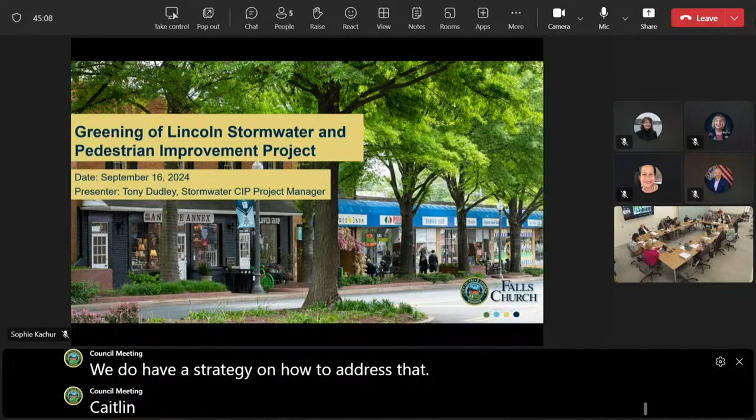Our first item is a briefing from staff on the Greening of Lincoln project. Tony Dudley is our project manager for this, and he'll detail the many meetings he's had with residents of the street, listening and processing input, and working through to decisions that represent a good synthesis of that input, with some compromises between competing views, but always staying aligned with the original purposes of the project, which Tony will describe. We do have budget implications from changes that came about through public input. The project budget is over $11 million at this point, so we want to talk about those numbers with council. We have a strategy to address that, and Caitlin Sobsey is here to help talk about some of those numbers and strategies. This could then flow into the council's year-end financial report and budget amendment discussion happening at the next meeting in a week.

With that introduction, I want to thank our staff, Tony in particular, for all the work put into the project, and all of our community members who've been so engaged. Andy, I don't know if you had any other introductory comments, or if we just turn it straight over to Tony. I'll turn it over to Tony.

Okay, Mr. Dudley. Good evening everyone. My name is Tony Dudley, I'm the Stormwater Project Manager for the City of Falls Church, DPW. Thank you again to Council and the City Manager's Office for allowing me to come speak to you this evening about our project, the Greening of Lincoln.

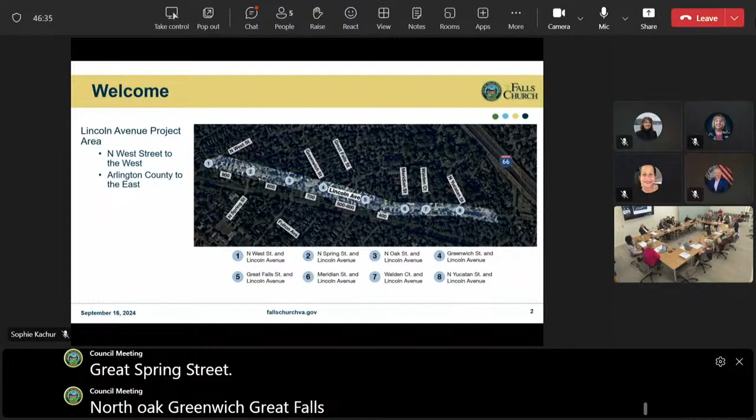The Greening of Lincoln project—I don't want to sound too formal, this is an informal work session, so I sound like I'm in front of Congress or something. The project spans from North West Street to the west, all the way to the Arlington County line to the east. It crosses several roads along the way: North West Street, Spring Street, North Oak, Greenwich, Great Falls, Meridian, Walden, and finally Yucatan, where it exits the city.

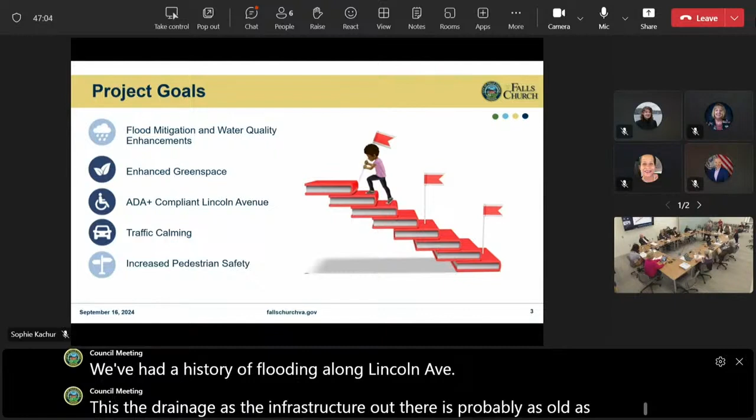The project had many goals. The first and foremost was flood mitigation and water quality enhancements. We've had a history of flooding along Lincoln Avenue. The drainage infrastructure out there is probably as old as the railroad bed out there—a lot of the pipes date back to when there was actually a railroad running along that corridor.

Another goal was enhanced green space. We wanted to reduce some of the unused and underused parking in order to create more green space along the corridor, and also to help reduce the overall impervious area. That in turn helps with permitting the project, because in many instances the state requires us to pay into a mitigation fund to do this kind of work, even though we're trying to improve the storm drainage—they treat us just like they would treat a developer. So we're trying to do our best to reduce the cost of permitting.

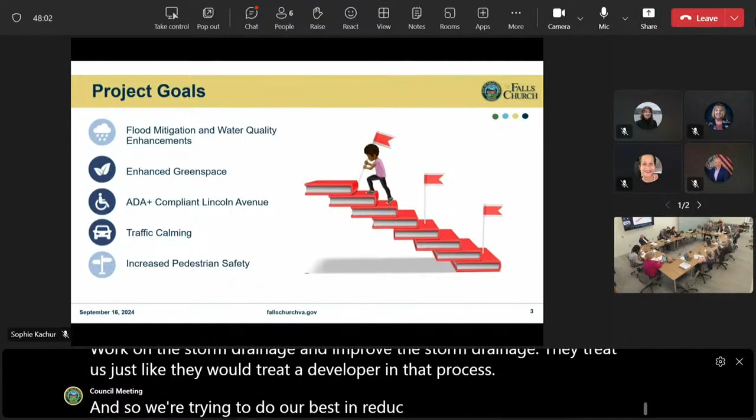ADA compliancy was a big one too. Right now the sidewalks are at best 4 feet wide, and all of them have poles that go right down the middle, as you'll see later.

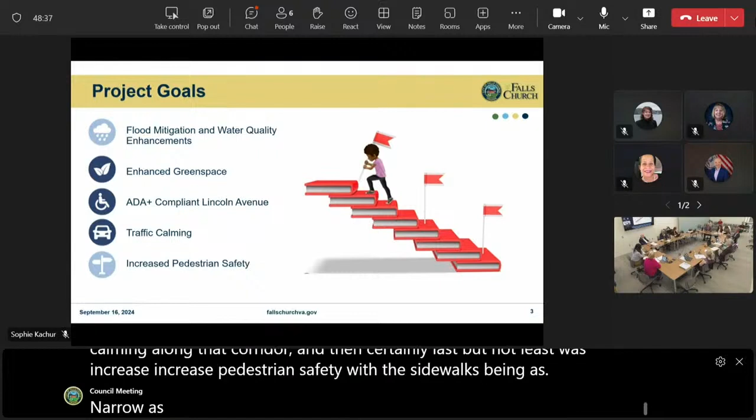Next was traffic calming. Based on the public's review of the project early in the process, before I even came along, there was a need to do traffic calming along that corridor. And then certainly last but not least was increased pedestrian safety. With the sidewalks being as narrow as they were, people had to walk in the road, sight distances were an issue, crosswalks were an issue, so we wanted to see that play out as well.

So some considerations we had to take into account included the existing condition studies we've done out there, local ordinances - I won't read all of these, you have them in front of you - and grant compliance, because the money we're spending has to be spent for a particular reason, a very specific reason. So there are some things the money could not be used for.

Green infrastructure benefits - that was something that when I came on board with the city some 3 years ago, council was pretty heavy on trying to incorporate green infrastructure into the city's stormwater infrastructure.

From a roadway sidewalk standpoint, we had to deal with perceived property boundaries. Even though you might have right-of-way lines that are further back in people's yards, people have adopted that front yard and front area of the right-of-way as their own and don't want to see it changed. Parking was an issue, has been an issue, and will continue to be an issue, it seems, as long as we do this project.

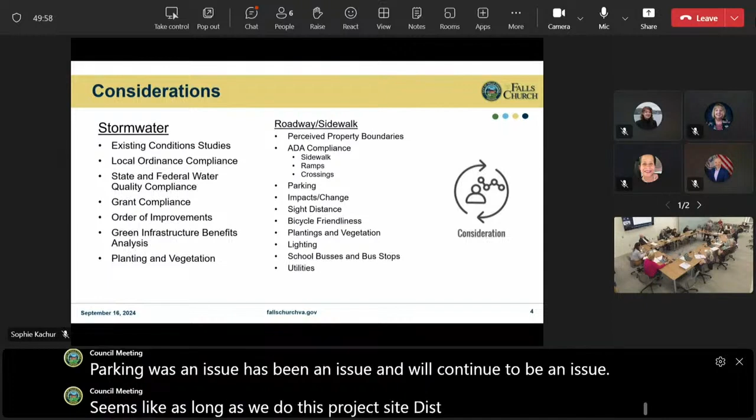Sight distances is another one we talked about - we had to look at all the intersections out there for sight distance components. More planting and vegetation. Lighting is another one we'll cover later, not as part of this project, but certainly something we'll have to deal with eventually. And then school buses and bus stops - yes, we talked to the schools and got their take on where bus stops were, making sure all turning radiuses could be handled by school buses and the like.

You guys were updated on the project back in January of this year. There wasn't a lot of information - we had just come out of the planning phase and were just starting the design phase at that time.

The CACT was updated for the second time - actually we've been to them twice, and my friend Arthur wants a third time for us to come and talk to them. Our first public meeting was held in February, where a lot of you were there, kind of saw the interaction with the community. It was standing room only in council chambers, so we had a great amount of participation. The Planning Commission was briefed in April of this year, and so was the Public Utility Commission.

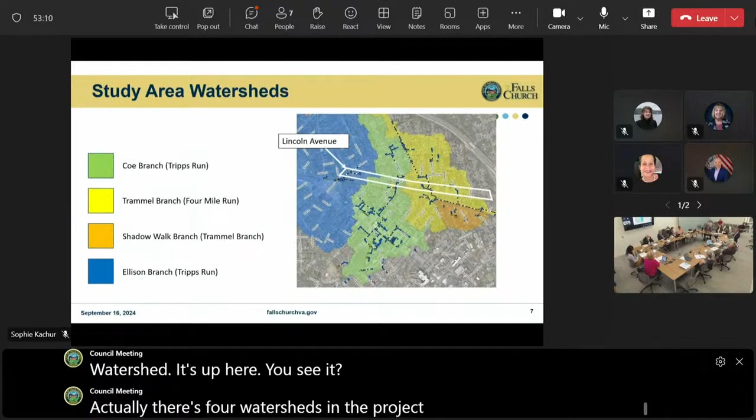Let's talk about the study area watersheds. There are 4 watersheds in the project area. A watershed is simply an area where rain that falls on it will drain to a single point. We have 4 of them in this area.

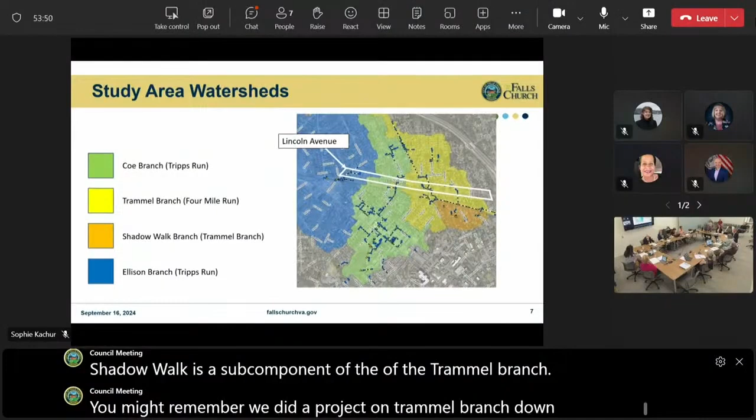We have the Ellison branch, in blue, and Coe branch, in green. Ellison and Coe eventually drain to Tripps Run. Then we have Trammel branch as well as the Shadow Walk branch, which is a subcomponent of the Trammel branch. You might remember we did a project on Trammel branch down on the W&OD just earlier this last year.

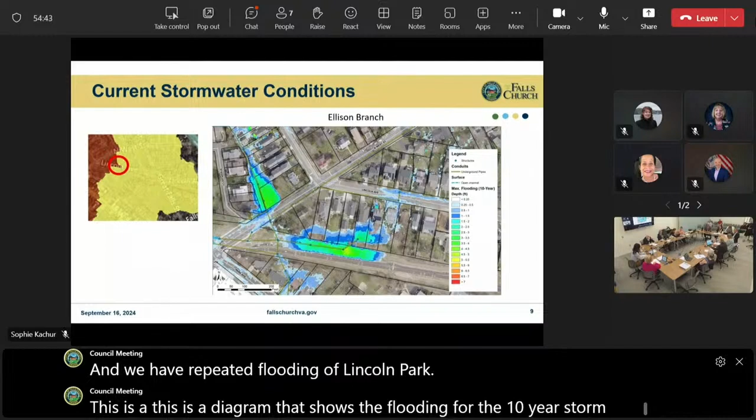This is a diagram that shows the flooding for the 10-year storm event on Lincoln Avenue in the Ellison branch area, in the 900 block of Lincoln, where you may be familiar with the house that has a flood wall essentially sitting in its driveway to stop water from coming over the curb and into their house.

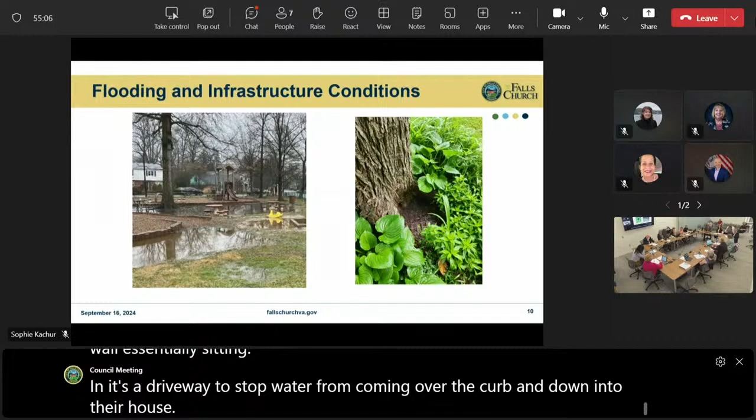So here is some of the flooding in the park. This is a pretty constant thing, it stays there for a couple of days. Our project will look to improve that.

The picture to the right is actually a manhole. You can see this is a manhole that a tree has kind of grown around, and that's indicative of the type of structure and infrastructure problems that we're dealing with out here on Lincoln Avenue.

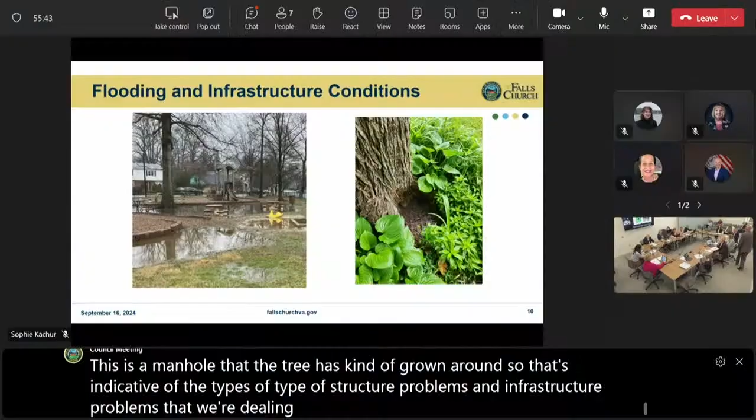Here's some of the issues we're dealing with as far as the sidewalks are concerned. We have very narrow sidewalks where utility poles are in the middle of them, and very wide streets. We have utility conflicts and failing pavement. Also, any of the neighbors would tell you we have speed control issues because of the wide streets, and pedestrian safety issues — someone was hit on their bike just about a month ago, if that.

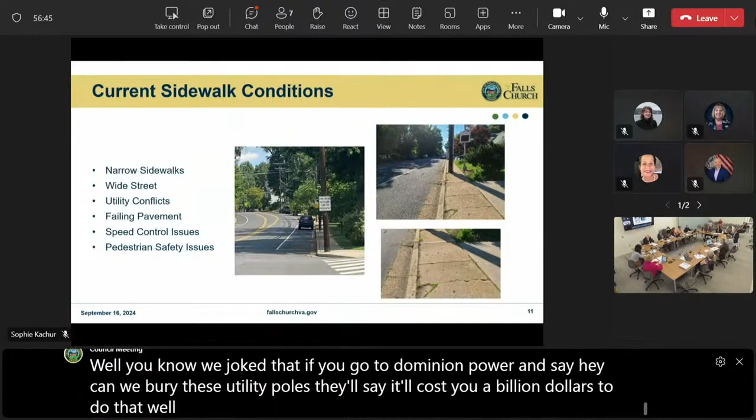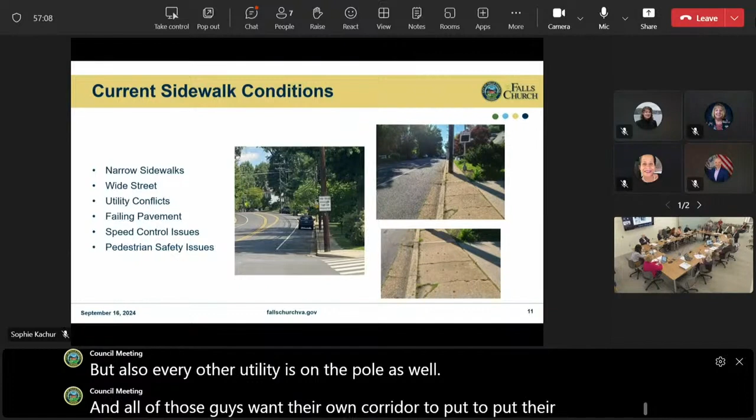So these are all issues we have to contend with, and the question is always out there: why don't you bury the utility poles? Well, we joke that if you go to Dominion Power and say, can we bury these utility poles, they'll say it'll cost you a billion dollars. Well, it won't cost a billion dollars, but it will cost several hundred million, tens of millions of dollars. Because you have to remember that not only is Dominion on the pole, but every other utility is on the pole as well, and all of those guys want their own corridor for their infrastructure, so it becomes very expensive very fast.

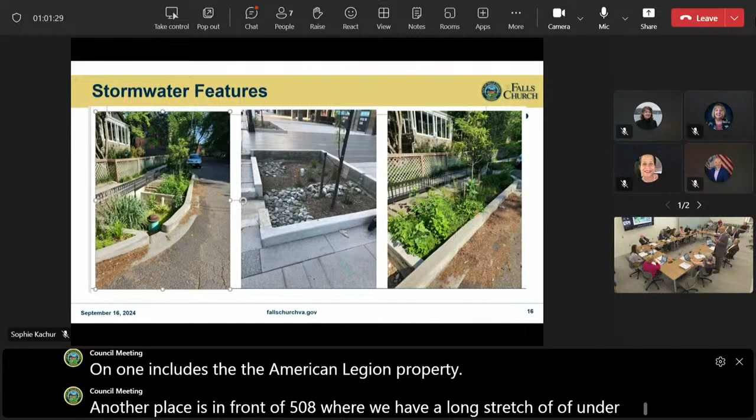Here's an example of some of the stormwater features we may include on the project. We know we have at least a couple of areas that will include these. One includes the American Legion property, another is in front of 508, where we have a long stretch of underused parking where we could use these types of structures. These pictures actually come from DC, which has been a fairly good leader in promoting what they call pocket BMPs, trying to fit these types of structures into an urban environment, which of course we are. Your standard BMPs tend to be, I joke, out in the middle of a field where you can build anything, but these things really fit in an urbanized area, and they look good too.

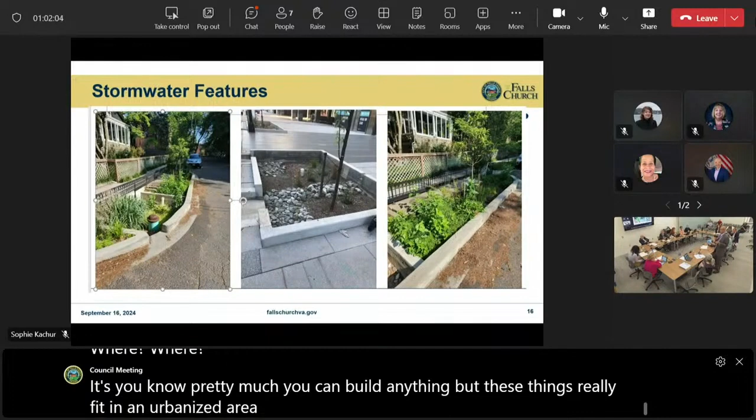Some other stormwater features we're going to use are pervious pavement—there's an example to the left there. We use that quite a bit in some areas, as well as underground detention. We don't have room for above-ground detention, but we are negotiating with the American Legion to put this type of detention facility in their parking lot.

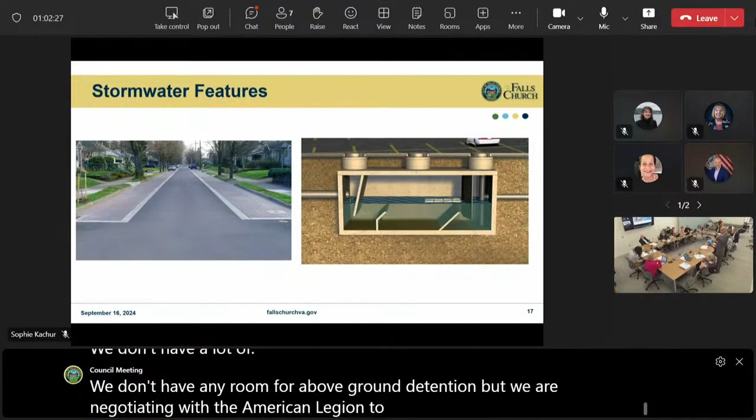Here's an example: we also plan for some underground detention in the park underneath the existing basketball court. That will minimize disruption to the vegetation there, but it will help throttle down the flow as we get it to the W&OD, where the pipe sizes are still a little undersized, so we want to throttle a lot of this water back before it goes down. Coe Branch is another place where we'll throttle that water back so we don't have any downstream implications.

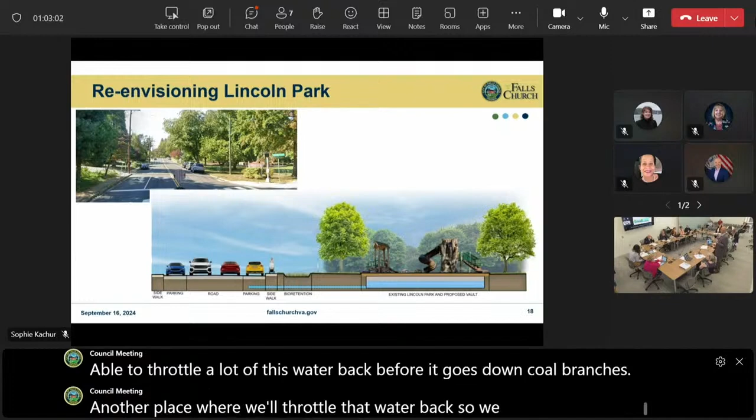So at this point I want to have Caitlin talk about the funding and the budget that we have for the project.

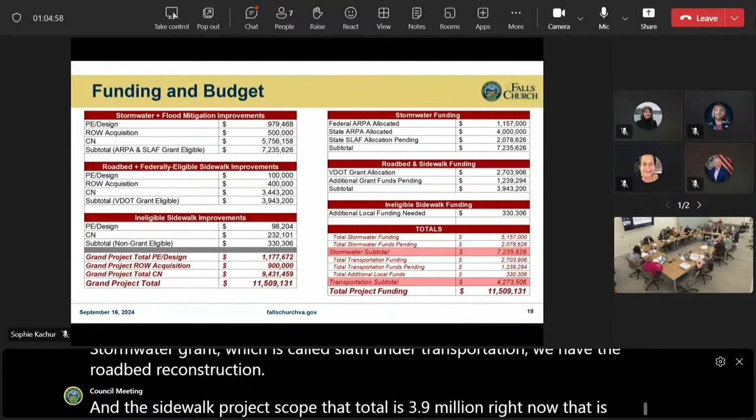That entire amount is eligible for grant funds through ARPA. We have federal and state ARPA sources, and then also another state stormwater grant called SLAF. Under transportation, we have the roadbed reconstruction and the sidewalk project scope. That total is $3.9 million right now, all eligible for a VDOT state grant through the revenue sharing program.

We've actually increased that project scope. It was initially just a roadbed reconstruction that we have a grant for through VDOT. We've increased that project scope to include more of the sidewalk improvements, the sidewalk missing links and curb ramps, and widening in areas where we can. The reason we've been able to do that is because of something called PROWAG, which stands for Public Right-of-Way Accessibility Guidelines, which is a federal guideline.

It was just approved or published in 2023. It's a federal guideline that requires us to update pedestrian facilities in the public right-of-way above and beyond the previous ADA guidelines. So that's how we made that extra sidewalk scope eligible for this VDOT grant—we used PROWAG to say where the work scope was not eligible before, it now is. So we've increased that to $3.9 million for the roadbed reconstruction and most of the sidewalk.

The last little section is a sliver of sidewalk work that is not eligible for grant funding from VDOT because it's not required by PROWAG. So that's what I'm calling the ineligible sidewalk improvements, and that amount is $330,306 to be exact. So that's our grand project total of $11.5 million.

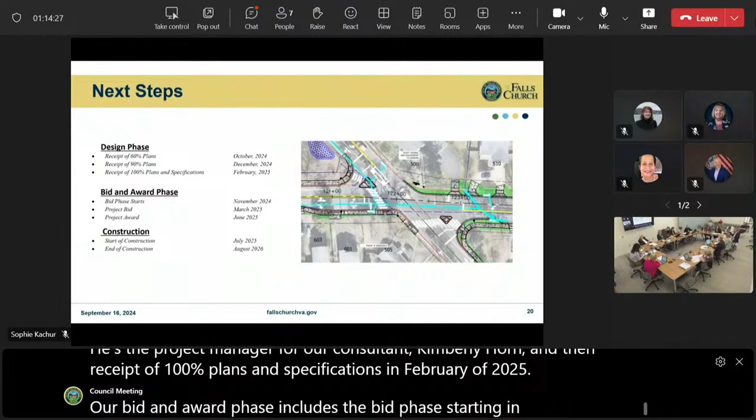And then receipt of 100% plans and specifications in February of 2025. Our bid and award phase includes the bid phase starting in November of 2024, that's when Joe and my good friend Jan start working together in order to develop the construction documents. Project bid would be in March of 2025, and then project award would be in June of 2025, and that's when you would see this again to approve the construction contract.

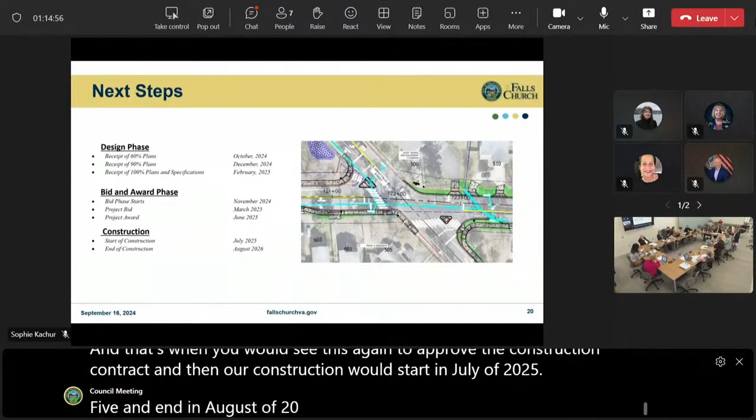And then our construction would start in July of 2025 and end in August of 2026. That is only September, October, November, December, 4 months shy of when we have to have this money spent. We have to have it spent by December 31st, 2026, or we lose it. It's cut and dry, simple as that.

So with that, what I'll do is, we do save questions, but what I want to do is run real quickly through what our existing plan entails, specifically the roadway, the sidewalk, and the storm drainage.

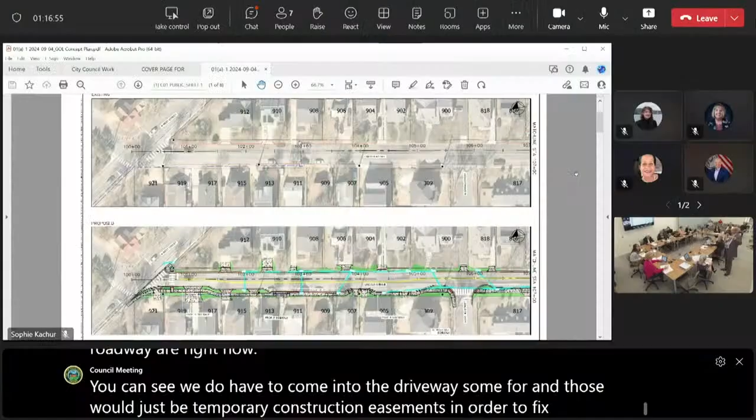As you can see here, here's West Street, and Spring Street is here. We've enlarged these sidewalks to about 6 feet in width. That faint red line indicates the existing curb and gutter, so you know where the existing limit of the sidewalk and roadway are right now. We do have to come into the driveway some, and those would just be temporary construction easements in order to fix the grades between the new sidewalk and the existing driveways. Some of the driveways, people bottom out on now, so a lot of those will be able to be fixed as part of this project and get brand new driveways.

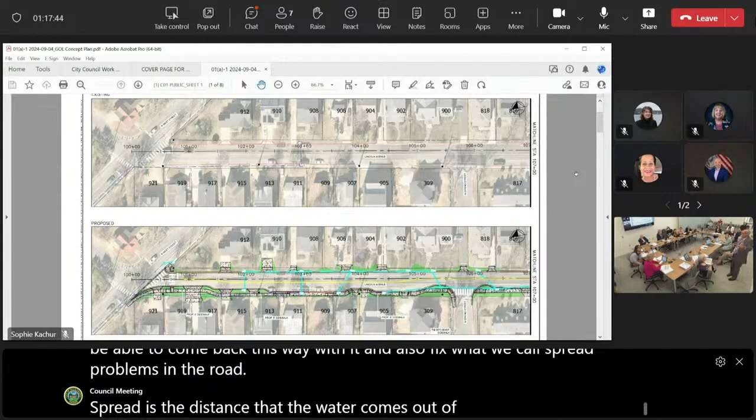We do allow parking on the north side of the street up until about this point, and there's parking here as well. 915 is where we have the worst case of flooding in this particular area. Our first choice was to go this way with the water, but now we're going to be able to come back this way with it and also fix what we call spread problems in the road. Spread is the distance the water comes out of the gutter during a storm event, and it inhibits the flow of traffic. We're able to resolve those back to today's standards, none of which the road is currently based on.

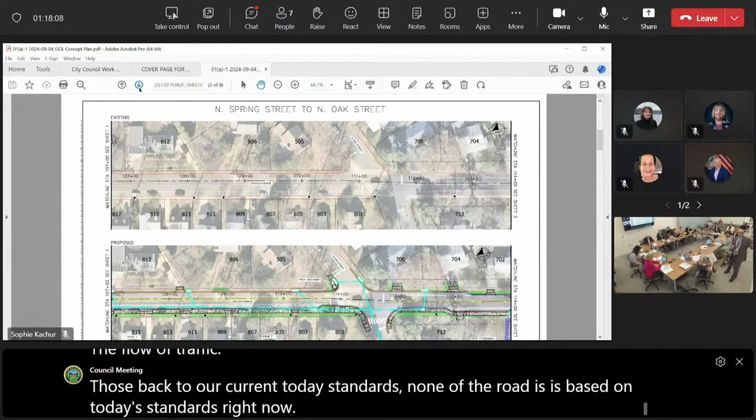Go to the next one. Here we're continuing. Notice we've come outside of the existing poles. We're not able to move those poles because - and I said this at one of the block meetings - I asked who wants to give me an easement to put poles further in their yard, and I got no takers. But we were able to move this out essentially, and we do have parking along this area.

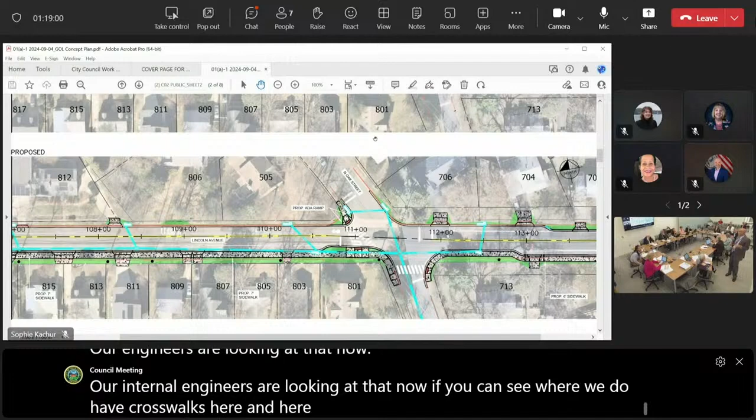And we have more green spaces in this area. We're going to be looking at the crosswalks here. These are not quite settled yet; we still have to look at sight distances and things like that. Our internal engineers are looking at that now. You can see where we have crosswalks scheduled here and here, and those will be raised crosswalks, so they'll act kind of like a hump as you're going through.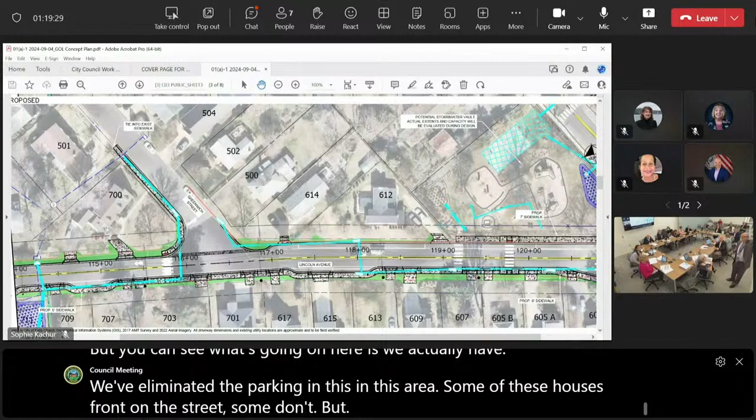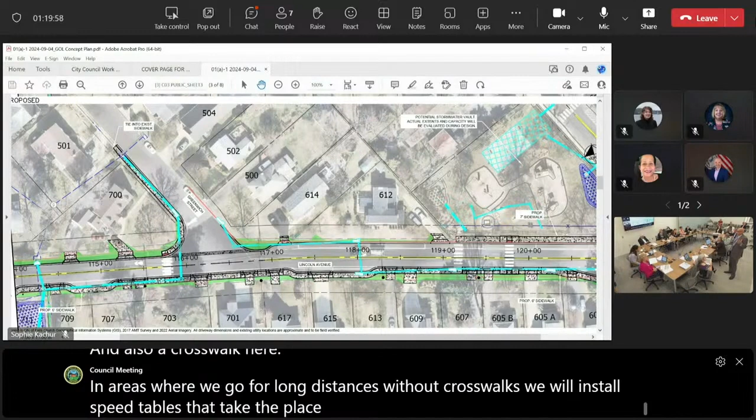Down here we get into - we'll talk about the American Legion in a minute - but you can see we've eliminated the parking in this area. Some of these houses front on the street, some don't. These areas here will be left as low areas, kind of like a last resort for flooding before it floods people's crawl spaces and yards. We'll have crosswalks here at Greenwich, not shown, and also a crosswalk here. In areas where we go long distances without crosswalks, we will install speed tables that take the place of the crosswalks we've eliminated. Here in the park, we'll do some underground detention in this area.

Also, we will install some underground storage areas in this vicinity, as well as bioretention, in order to eliminate some of the ponding that we see currently in the park.

Here you see that we've moved the sidewalks out into the street because, again, we wanted to narrow the roadway. Because why? Because that calms traffic. That reduces speeds in the area.

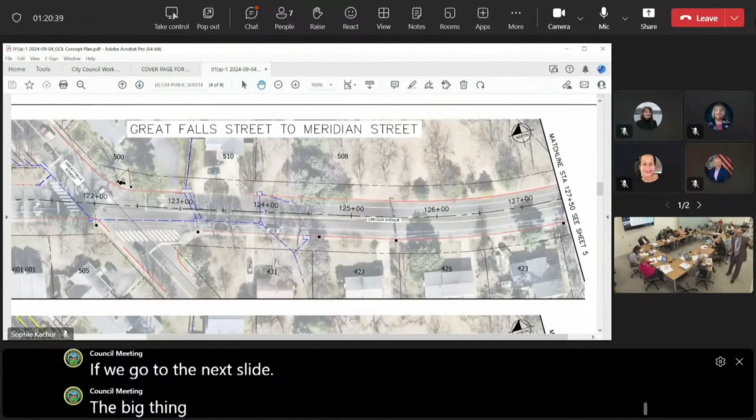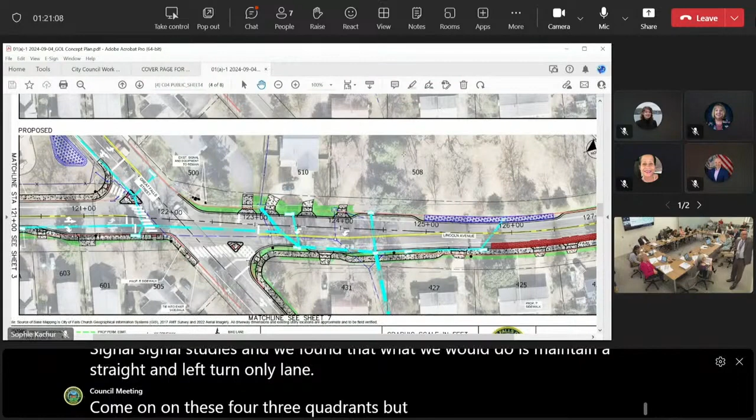If we go to the next slide, the big thing here is the intersection. So we have made some changes to the intersection. We did some analysis of the traffic there, as far as traffic count and signal studies, and we found that what we would do is maintain a straight and left turn only lane on these three quadrants, but we would just leave the straight left as a single lane going north.

We also would maintain or create islands here for two reasons. One, it allows for a right turn lane, and also it shortens the crosswalk so that you don't have as far to walk across. There's a refuge, you could say, for pedestrians as they come across.

As we get further down, you see where we do some bioretention here in front of 508, and we also do some permeable pavement in these areas here. And again, you can see where the existing curb is, so we have narrowed the road quite a bit in these areas.

We can go to the next one because I want you to have time for questions. Go down a little bit.

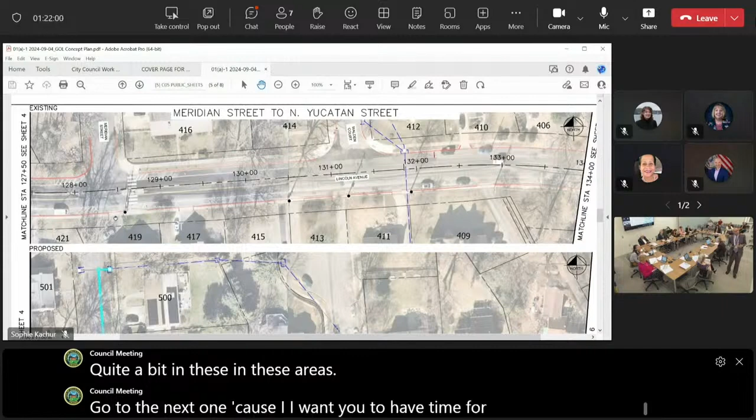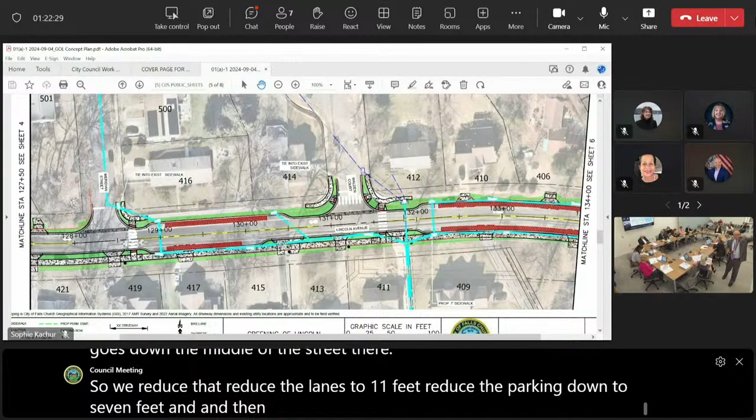So the same treatment here. We've moved the poles to behind the sidewalk. We narrow the road physically here, and it is narrowed in these locations as well. Right now there's a painted median that goes down the middle of the street there. So we reduced the lanes to 11 feet, reduced the parking down to 7 feet, and then also given a visual narrowing through here with both concrete liners and permeable pavement.

Again, you can see here that we've done the same thing. We've physically narrowed the road here at Walden Court. But this was an area where we also had a lot of flooding. So you can see some of the stormwater improvements that we make in these areas in order to alleviate that problem.

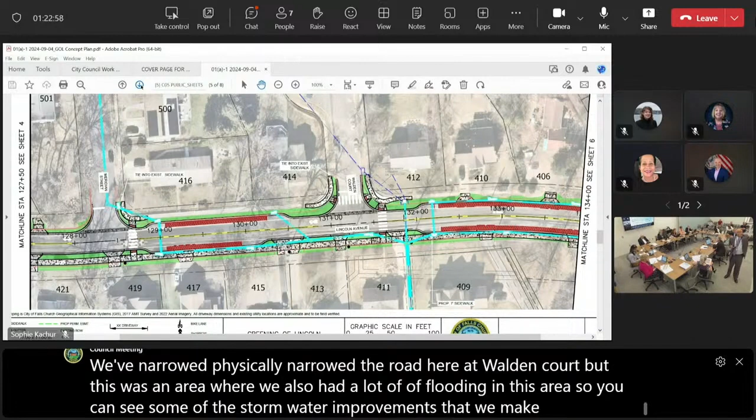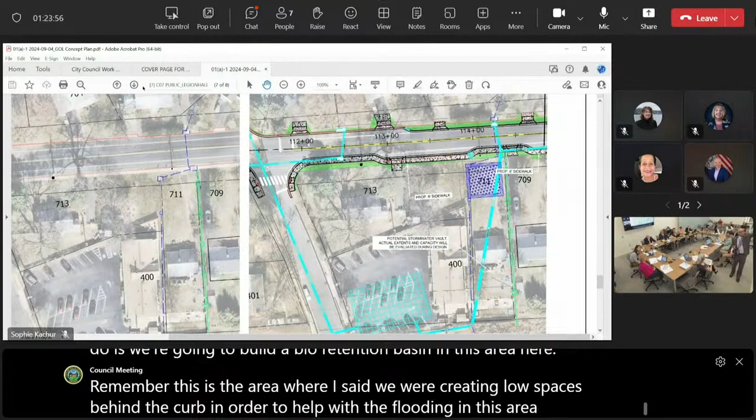And we also want to plan an underground detention basin in the American Legion's parking lot. At first, we thought about doing it in this area here, but this seemed to be the more sensible place to put it. We will be tearing down this house here in order to allow for this pipe. For those of you that don't know, that house is currently condemned. The back half of it is actually missing right now.

Helping the Legion with this particular issue while they help us with another issue, essentially, is the best way to put it. I think that's owned by, yes.

This property here and this property, all of this and this is owned by the Legion. And if you've never been in the Legion, you need to get an invite because it's pretty fancy in there, I have to say.

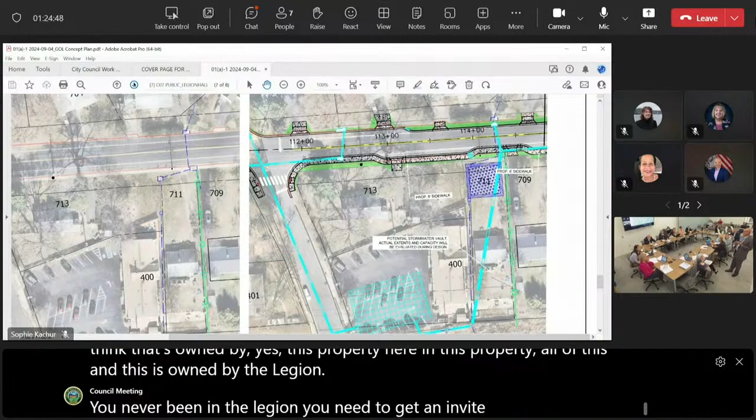So that's about it as far as the project is concerned. Again, detention. So I think you got one more with the Lincoln Park.

Oh, okay, yeah. So we kind of saw this before, but we have an existing basketball court here. We're going to be using that as underground detention. We're also going to be doing a little bit better drainage components here. This sidewalk, we're moving this crosswalk because this driveway kind of backs into this crosswalk here. So we want to move it.

And the reason we like this is because there's a big energy facility right here. There's an underground power station, essentially, that it's underground, but you can see it. It's a green box. It stands about this high, about this wide. No way do we want to move that.

So we move the fence down, the gate to the park down to this area here, and install a sidewalk here where currently there is no sidewalk. So we feel like that'll be a big improvement to the area to have sidewalk. And we maintain parking in this area along the park itself.

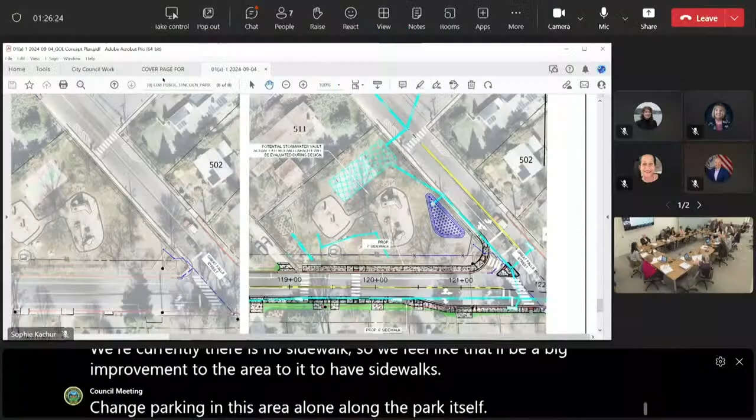So that does it as far as, that was a quick run through. You guys have the plan in front of you. So with that, I'd like to open it up to any questions.

Well, first of all, Tony, thank you. When I think about the objectives between stormwater, green space, accessibility, traffic, pedestrian safety, these are all the top priorities we regularly hear from everybody. It's really hard to get any one of those perfect, but to try to balance all of them is really an art.

So thank you for all the hard work. Thank you for all the detailed block meetings, the briefings, and then the comment response matrix. I read through every single one of them and most of the emails. I think it's really impressive how specific and detailed and responsive you've been to everybody and trying to incorporate all that.

So I wanted to give you kudos for that. I actually had a neighbor at a neighborhood party, someone unsolicited, give me feedback about how much they appreciated the outreach you had done to the neighbors. And so that came unsolicited, so I wanted to make sure you heard that.

And then the second, actually, before I open up for questions, is actually kudos to Justine. I know she's put in a ton of work in meeting neighbors where they are and hearing feedback, and I think that detailed outreach really does make a difference. So kudos to both of you. So with that, questions and comments?

I'll start with Justine, who knows probably more about this than any of us. I just want to second Letty's comments. Thank you for meeting people where they are and actually walking the street with people. I've seen you out there many, many times.

I do remember when you first started this project, you mentioned that you had another project in DC that was incredibly difficult, and so you're entering this with, I guess, some confidence. But I also wonder if now that we're 50% of the way through this, maybe this project's actually even more difficult than the one you did, when we have such a deeply engaged and involved population, probably more so than anywhere else in the country, I might say.

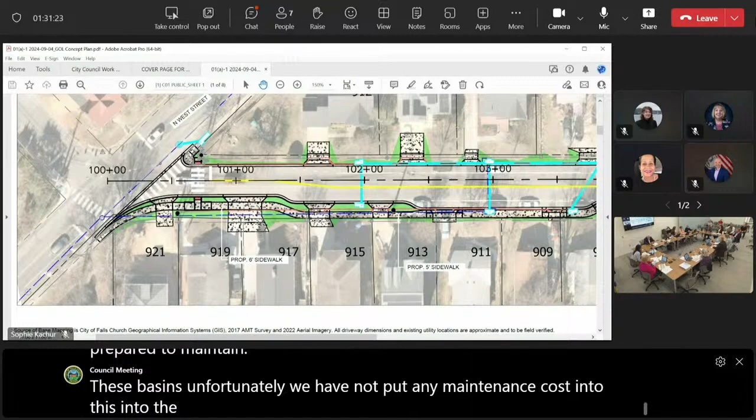Unfortunately, we have not put any maintenance cost into the cost that you see there. And in order to, if council is going to prioritize things like pervious pavement and green infrastructure, there is maintenance costs that go along with that. DPW staff leadership will bring forward those types of things, because we won't be able to keep a zero-sum gain on our maintenance as we have it today. We'll have to see some increase.

And it's not like we don't do any of that today. We have BMPs, like for example over on Westmoreland, just off of Tripps Run, where we maintain the detention basin. So there will be some increase in costs, but that is kind of what comes along with water quality components and green infrastructure.

Okay, well I guess I would care about making sure that we get that on DPW's docket, so that it's not like we do this project and then suddenly five years down the road we have to maintain it or do whatever else. So just as long as that's on council's radar for budgets and DPW's radar.

So then actually going down on this page at 921, it does look like the sidewalk goes onto their property. Is that the case? Is any of that down there going to go onto people's property? Honestly, council member, that area is kind of in flux right now because of the fact that we don't currently have sidewalk right of way down that area.

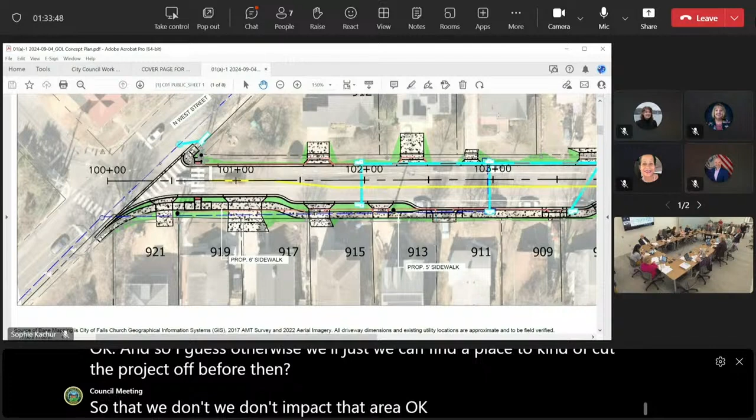Okay, gotcha. So that is one area that's kind of in flux depending on the right of way, and depending on working with the homeowners there. We do, though, I should say, from a traffic standpoint, we are planning to do a no right turn on red at that intersection.

Perfect, okay, that answers the next question, so thank you. Okay, let me just make sure I'm not missing anything.

Is that crosswalk there, would that be a raised crosswalk? Yes, that would be - not the crosswalk that you see to the left, but the one to the west. The one crossing Lincoln? Yeah, the straight one. That would be a raised crosswalk, yes.

Okay. If residents so desired, what would be the pathway for permitted parking on Lincoln? I'm going to throw that to Wyatt - could you talk a little bit about that? So some residents were asking to plant the seed, so they were wondering what would be the process.

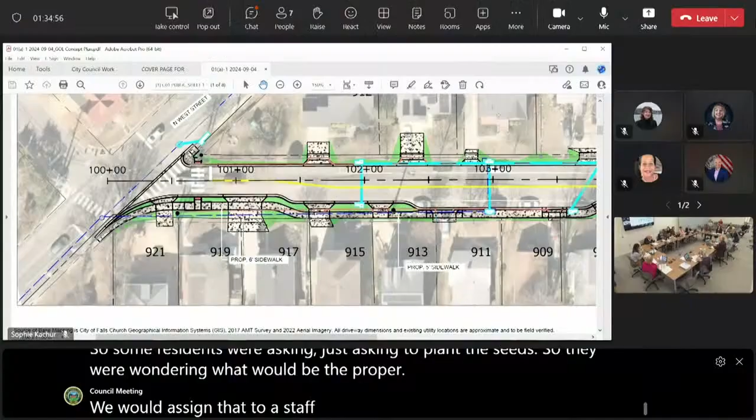We would assign that to a staff member who would work with the neighborhood. There is a petition process where we need to have an indication that a majority of the residents would want that, and that also then would prompt a parking utilization study. The combination of the data from the study and the petition from the residents ultimately feeds into a decision. We do have a couple of zone parking areas in the city - generally they've been around new mixed-use development, that's where we've implemented those in recent years.

Okay, so there would be the pathway here as well. That's right. Okay, great, thank you.

Are all crosswalks on Lincoln right now raised crosswalks? Not now, but now in the plans, yes. And then are the intersections, like the Great Falls intersection, and what else, Spring Street or Oak Street, the crossing streets, also have raised crosswalks? Yes.

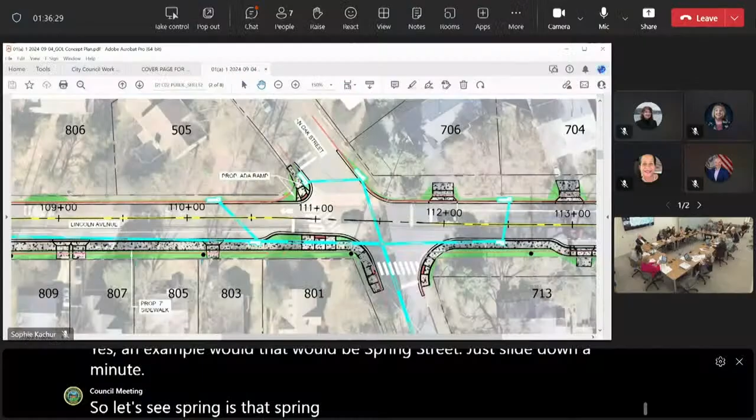And are there any crosswalks in the plan right now? Because you'd mentioned there had been maybe a crosswalk that went to nowhere. There are some crosswalks in the plan now if you go to the second page. An example would be Spring Street. Just slide down a minute. So let's see, is that Spring? No, I'll go back one page. There we go, all right.

So here you can see where at first we had crosswalks that went across the street from the Spring side to the other side of the street. But of course there's no sidewalk over there to go to, right? So in these instances, what we're suggesting is that we put in raised speed tables in these areas to make up for the lack of a crosswalk. So again, we're slowing the traffic down, but there would be no crosswalk there. So that would be the main area where we would have speed tables.

Okay, but nothing on the east side, just mostly right here. Well, on the east side, most of the crosswalks go somewhere over there, so that's where we would have the raised crosswalks. Right, but no speed tables on that side. We don't have any plan, but I probably will talk to the traffic engineers, because they have to review this project as well. We're kind of in that review process, but we'll see if there may be one or two needed over there where we have long stretches that need it.

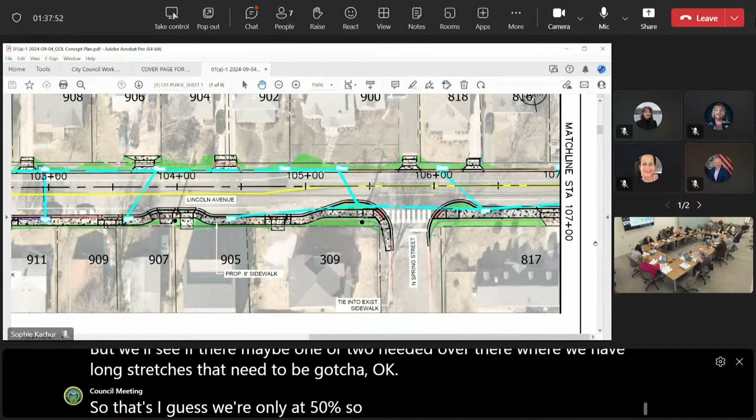Gotcha, okay, so that's, I guess, we're only at 50%, so that's something in flux as we go along. Right now the speed limit's planned for 20 miles an hour. We're planning for 20 miles an hour, yes. And then it's currently 25.

25, okay. Another question I got about rapid flashing beacons - do any of these intersections have rapid flashing beacons? Currently there are no rapid flashing beacons planned, but honestly I would like to see one at Oak Street, like a flashing stop sign. If you're not familiar with these, they're just a stop sign that has lights around the stop sign itself that kind of promote the stop sign a little bit better. So it wouldn't be something where you push a button and it flashes - it would be continuously flashing. I don't know what the costs are, but that would probably add some expense to the project.

I just want to add about the rapid flashing beacon - if we did add that here and used grant funds for it, it would require a traffic warrant study to justify the rapid flashing beacon. That's something we've actually had a hard time justifying in the past. We had a hard time justifying it across South Washington, so I would imagine we would also have a hard time getting a warrant to justify that across Lincoln. I just want to say that for the public record.

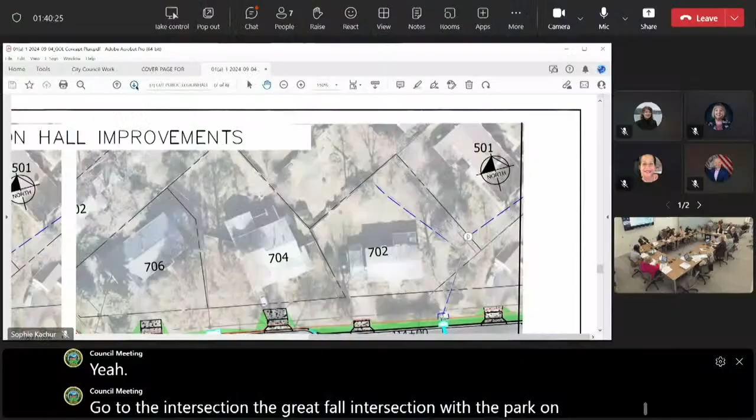Let's see, hold on, one more. There we go. Here we go. That's good.

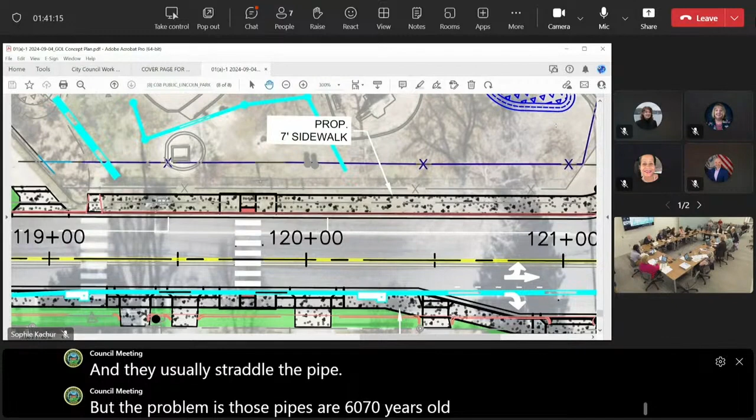You see where it says proposed 7-foot sidewalk? There's a tree right there that is outside of the park limit. That's one for sure that we know we'll be removing. Another tree we'll be removing is the one by the manhole. There are a few more along the corridor where trees love to grow over corrugated metal pipes, getting their nourishment from the water and straddling the pipe. But the problem is those pipes are 60, 70 years old, and when they go, the tree goes with them, be it windstorm or what have you. So it behooves us to remove some of these old trees because they're not healthy where they're sitting.

But in other instances, if you scroll to the right, we'll go one more page over if you don't mind. And then scroll down. All right, so in one instance, well, let's see, did we go too far? That might have been too far.

There are some trees. We had proposed a sidewalk for the east side of Great Falls, south of Lincoln. And there was some feedback saying, hey, you've got some trees down there that you would be impacting.

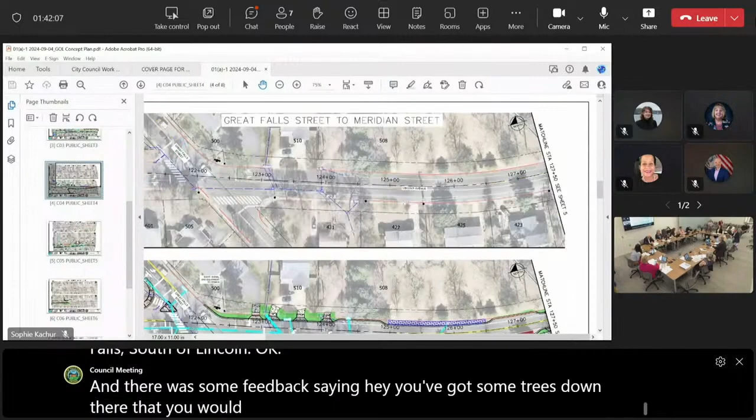Yeah, that's it. If you scroll down, yeah. So you see, I'm not going to get up. Just in the middle of that page, zoom back out again and go down. Yeah, there you go. That's good.

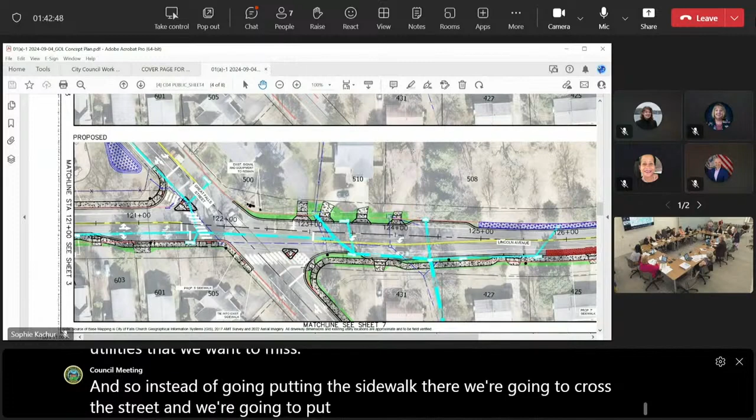So you see the sidewalk that we had planned for the east side of Great Falls, south of Lincoln, headed towards the W&OD. There are several older trees down that area that would have been impacted by that sidewalk. But also in the way down there are some utilities that we want to miss. And so instead of putting the sidewalk there, we're going to cross the street and put the sidewalk on the other side, where there's an existing sidewalk, and improve that sidewalk so that it meets PROWAG, which will serve as a way to get to the W&OD from there. So we will be eliminating what you see as sidewalk on the east side there.

So for that specific area, I guess we're talking about this piece we're pulling on. Right now these plans show a sidewalk on the east side, but that sidewalk would be removed. Well, it's not there, there's no sidewalk there now. So it would be removed from the plans that we have. And the main reasons for that would be for tree canopy and for utilities.

And then also, does that save money on the project too? Well, not really, because we have to redo the sidewalk on the other side. The sidewalk on the west side there suffers from the same problems, so there would have to be a brand new sidewalk there. But it would save some money in the fact that we wouldn't have to remove any trees, which are expensive. And I'll tell everybody it's not my first choice to remove trees because it costs a lot of money—we're talking $8,000 to $10,000 a tree to remove those types of trees. So we wouldn't have to remove any trees, we wouldn't have to deal with any utilities. So yes, the answer is yes, it would be cheaper to build the sidewalk on the other side.

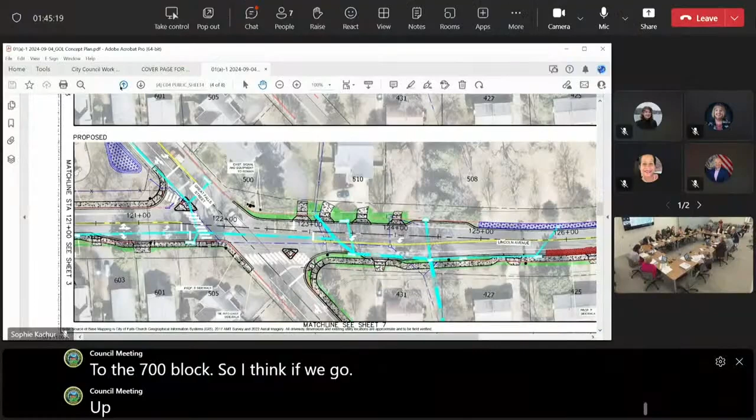So then I'm also wondering, going to the 700 block, so I think if we go up a bit... back a page or... plans, two, yeah, right, I think it's... scroll down... yeah, this is good enough.

So I guess what I'm wondering is, again, this gets to the green landscaping. Where the sidewalk is, is that as close to the property line as you can get? Or is there a green buffer between the sidewalk and people's property, such that you could put the green buffer on the other side of the sidewalk?

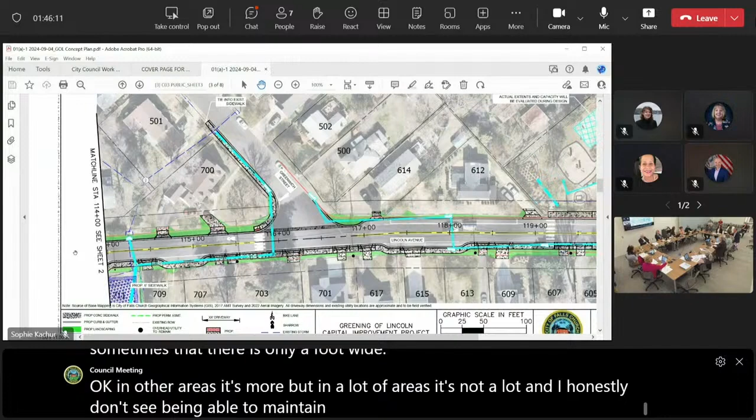Okay, so we've talked about that internally, and the problem we get into is sometimes that area is only a foot wide. In other areas it's more, but in a lot of areas it's not a lot, and I honestly don't see being able to maintain or even grow anything in an area that small. So just like the reason we didn't put any medians in the middle of the street, we pushed all that to the side so that people could maintain it themselves and not necessarily have this dead patch of dirt growing between the sidewalk and the street.

Okay, so in some cases there is a little bit of space. Some cases there's a little bit of space, there's a bit more, but generally we put the poles in that area. Would the space where the Legion is... let me just see, can the sidewalk run behind the utility pole away from the road, since the city's turning that property into a stormwater management area?

I agree to that. The house on the corner there does not have any off-street parking, so we agreed to have parking in that one area, towards 711. 711, 712, 713 maybe? Let me pull this up on my end.

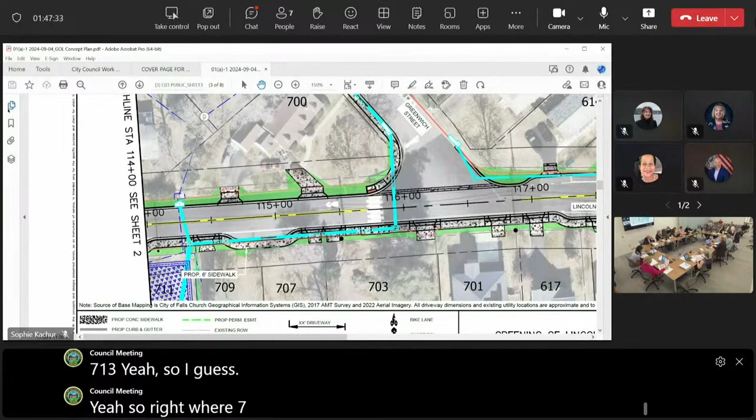713, yeah. So I guess, right where 7-Eleven is, and that utility pole is, it wouldn't be possible to move the sidewalk to the other side of the utility pole there.

Yeah, I think anything is possible, but there's also a need to have, so you can see the parking that we kept in front of 713. What we did, we also have a need for maintenance vehicles in that area as well, so we were trying to put in as much parking as we possibly could.

To move the pole, we put that pole outbound of the, we also have to impact 709 as well. Okay, so again, yeah, we do have access to the 7-Eleven property, but 709, like I said, I'm trying to stay out of people's front yards.

Gotcha. What about, so I guess, and then the final utility pole at 305 Lincoln, so this is all the way on the edge of the city. That's, I guess, the one place where we didn't add ADA compliance.

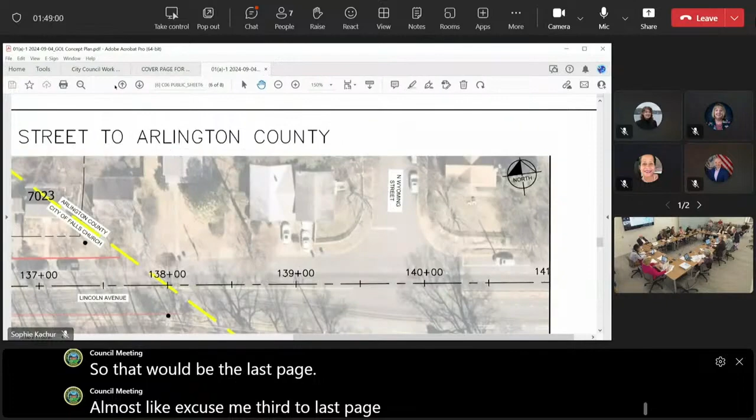Is that something where we could... so that would be the last page? Yeah, almost last page, excuse me, third to last page. So it's the very end of just... yeah, keep going down that way. There we go, right. One more maybe. Oh, one more. Yeah, here.

So your project, I guess, ends before that final utility pole. That one down to the right? Yeah, it ends, yeah. So I guess this would be an expense, being able to put some sort of sidewalk or ADA accessible route around that. I mean, it would add to the project cost.

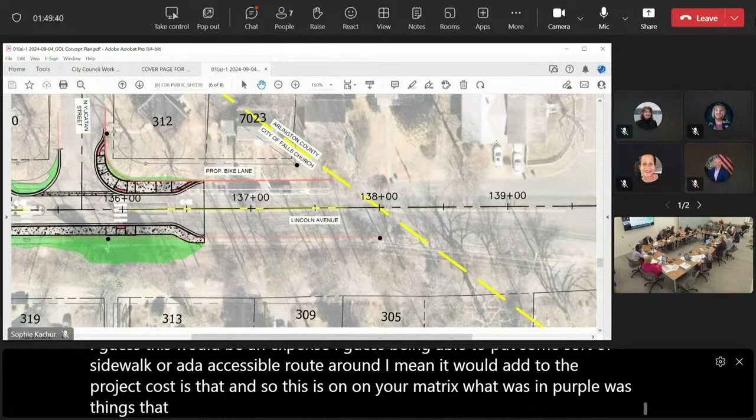Is that, and so on your matrix, what was in purple was things that are up for consideration. If there is money for that, is that up for consideration, or is that completely out of bounds?

Well, I think it's completely out of bounds. We do want to maintain parking in that area. I don't think we necessarily would have to take it, but the other thing was encroaching into that natural area was also a big no-no as far as the residents in the 300 block were concerned.

Okay, so I guess you have to stay behind, so you'd have to come down to the south there quite a bit, and then you'd have to increase the sidewalk width, and you would be encroaching into that natural area there. I see, okay.

Okay, so then, now going to my last 4 questions. I promise I'll wrap up soon.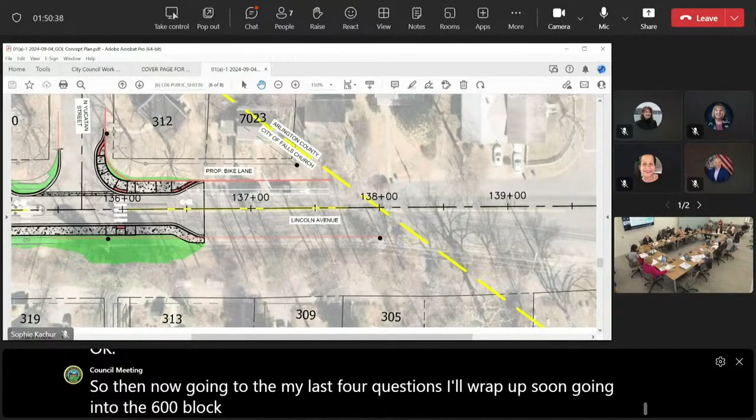Going into the 600 block near Lincoln Park, are there... so that would be... are these hard questions? Yeah, okay, we've graduated to the hard questions. Yeah, these are the hard questions. Yeah, this is the last 4, and they're the hard ones. Yeah, so this 600 block Lincoln area.

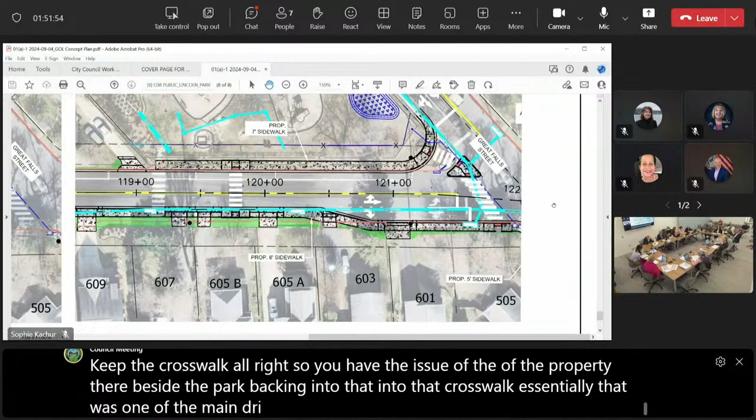I guess, is there any way—let's say if that crosswalk were moved, I know you gave very good reasons for why the crosswalk's where it is—if it were put back, would there be a way to change the sidewalk to go around the utility area, such that maybe it does go into the park a little bit? That would be a way to both add parking and keep the crosswalk. So you have the issue of the property beside the park backing into that crosswalk, essentially. That was one of the main drivers behind moving that.

And you talk about the balances—that was brought to us by that property owner. I have to watch people as I'm backing into the road. So moving that, and moving it that far, is to get it behind the utility, essentially—to get it to the other side of the utility. So you don't see any sort of compromise here, but you pretty much see that's where that crosswalk would need to go. That's how I see it, yeah.

Okay. In terms of parking for the park, I do know there are parking spaces on Great Falls, but oftentimes they're not utilized because it's not obvious. I don't know how wide this project can extend, but if there's some way to make the parking spots on Great Falls more obvious, that would be a way to increase parking in a way that hopefully makes it easier for people to access, especially in an area where so much parking is getting removed right now.

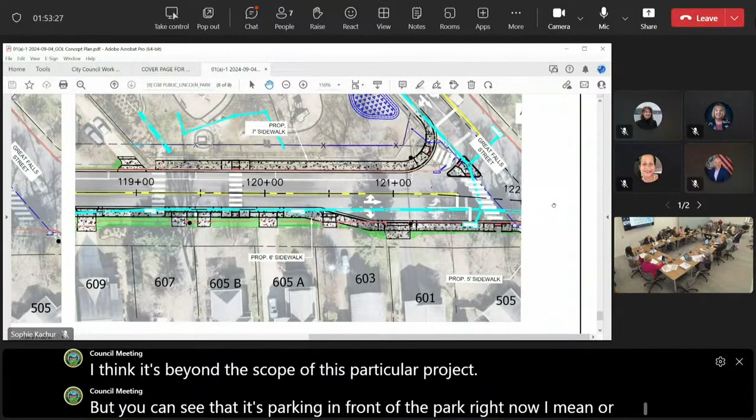I think it's beyond the scope of this particular project. But you can see that there's parking right adjacent to the park right now. So in that specific area, as long as we're talking about this, what are the trade-offs? Do you see any simple way of adding parking back in there?

Honestly, I don't. The right-of-way lines that are shown there are not correct. The right-of-way lines you see are pretty much right at the edge of people's existing property right now. That was one of the very first meetings I went to, from a group standpoint, to talk about what was going on there. At first, we eliminated the turn lane in order to keep the parking, but that meant the sidewalk also encroached into the 601, 603, 605, 607 yards.

Matthew Raz was one of the first people to come in, and he did some drawings to show, hey, this is how much it impacts my property—you're going to take my walls, and that guy's walls, and that guy's walls. At the time, we didn't know exactly where the right-of-way was, but then we found out the right-of-way is right at the walls. So the right-of-way narrows in that area, and there's no city property there.

The quote that I remember was, 'Use your property, not mine.' That meant use the street to do your work, not my property, not up into my yard. I took that at face value, because the sidewalk was going to come into his front yard quite a bit. A couple of the neighbors there said, if I have to choose between my property, my wall, and the parking, I choose my wall. And of the four or five people that were there, if four of them were saying that, then in my mind, that's consensus, because I'm not going to be able to please everybody all the time.

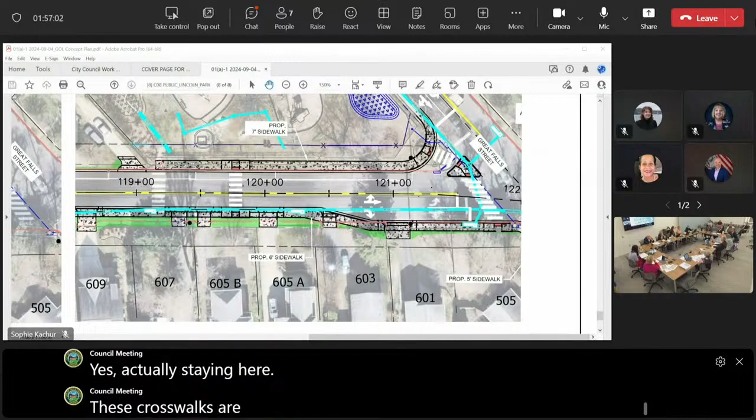A lot of these crosswalks are narrowed, or come to what I'd consider pinch points. Has there been talk about putting more of a pinch point there? You have the crosswalk, but it doesn't narrow. We have the island there, the refuge. The mid-block crosswalk, I meant - not eliminating it, but narrowing that space, since you have parking there, but obviously not parking at the crosswalk itself.

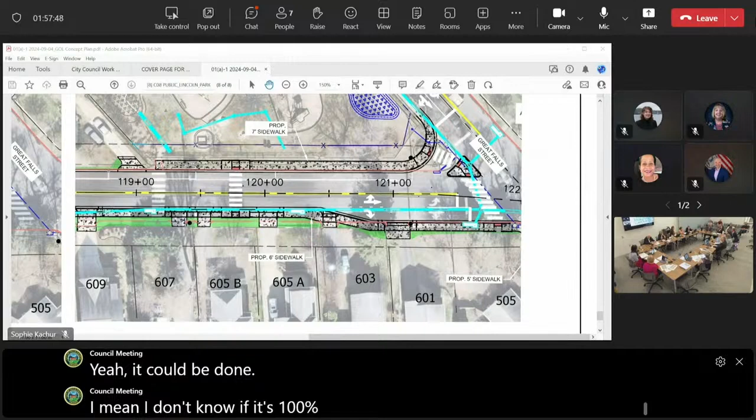Extension - does that make sense? I'm not sure I follow. Yeah, it would be a bump out at the crosswalk. This was another piece of feedback I got. Yeah, it could be done. I don't know if it's 100% necessary, but we're pretty narrow through there already.

But I guess, in some ways, because you have the parking lane near the park, there could be something there. Yeah, it could be, we can look at that. I'm curious about cost, since I have no idea the scope of this stuff - are bump outs more expensive than regular pavement? Yeah, they are - more forming, concrete, fill. They end up being a little bit more expensive.

One of the other comments was asking about Oak and Greenwich Street - it would be on the northeast side of Oak and Greenwich. Yeah, I've seen that comment, we're going to take a look at that to see if that's possible.

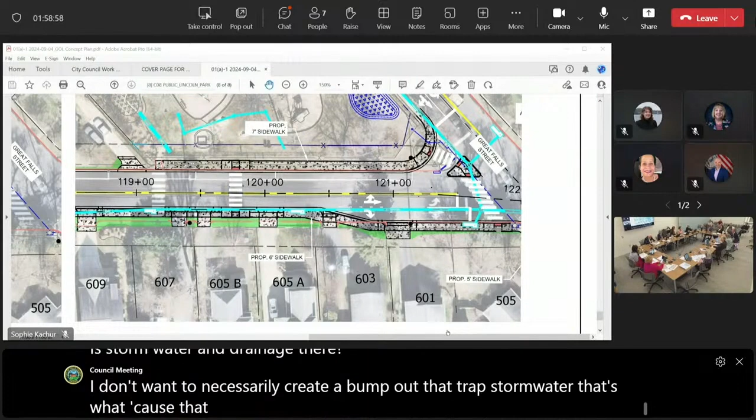The only issue we have is stormwater and drainage there. I don't want to create a bump out that traps stormwater - that stormwater comes down that street, right? So we have to put some type of catch basin in there to handle it, and I need to make sure the catch basin doesn't have to be so big, because of water coming around it and then out into the street, messing up our spread.

And then I think we're almost done. In terms of how narrow are the pinch points - do they come down to 22 feet? So what I was asked was, is it possible to make some of them more narrow? Zach had said that even for buses and snowplows, it's okay to have pinch points that are more narrow, as long as they're only in one or two places. It's the emergency vehicles we talk about at that point - they need, or are more comfortable with, 11-foot lanes, but that's about as narrow as the fire trucks and fire engineers like to see. So that's why we were sticking with 22 feet as a minimum.

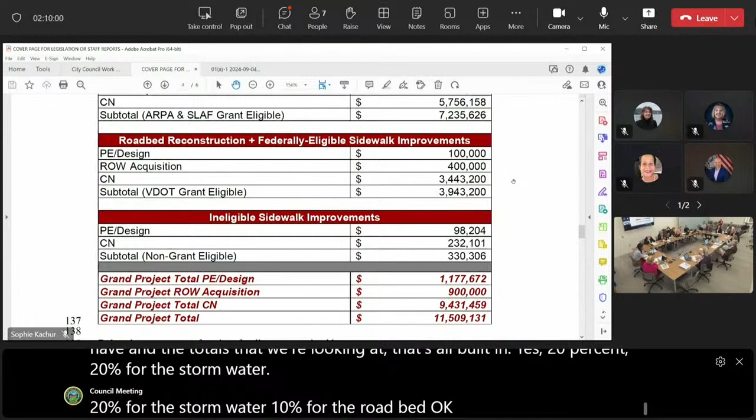On stormwater, I guess I've raised in other contexts, when you do the stormwater analysis for this project and you're talking about undersized pipes and the vaults and whatever else we're going to be doing at the Legion and Lincoln Park, is that based on current conditions as to pervious versus impervious coverage, or are you modeling it so that, say, this area is at 35% impervious coverage, and given the investment we're making, you're confident that 35% impervious through this area with the vaults, even given current pipes where you're not expanding them, that you are overall alleviating flooding issues people are currently experiencing?

Yes. The first answer is we're basing it on existing conditions and existing land use. So the one thing we do have in our back pocket that we didn't have previously, is that if anybody comes along and tries to put in like a McMansion or something like that, they're responsible for their stormwater management on their property. So they have to offset essentially that additional runoff, so we would not have to account for it. Whereas we didn't have that in the past, because no one had to do or manage their water on site.

So now they have to manage their water on site, so we're safe, and we know that this area is not going to turn into any really heavy commercial development or anything like that.

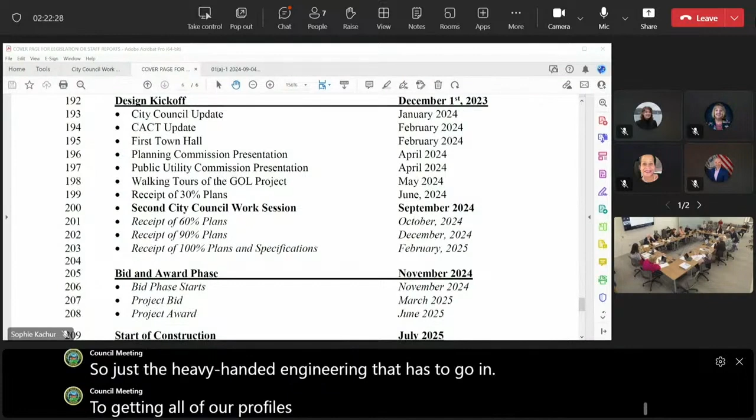So really, those are the next steps, just the heavy-handed engineering that has to go in to getting all of our profiles and all of our stormwater discharges and everything else straight. So I want to thank you for a very complicated but very interesting project that does achieve a lot of critical objectives.

I think the question is, is it clear to the community what remaining input is possible and when? Do you feel after tonight this is a go? I do. I'm just trying to figure out procedurally so that the public has a clear understanding of where this project goes now. If people might have comments—again, I think you've done a fantastic job working through these comments. Thank you, Council Member.

I'm just trying to figure out, because I know that the 60%, 90% plan thing created some issues with regard to Park Avenue. So I'm trying to figure out, so everybody has a clear understanding, what's the process from here on out?

So Tony, if I may—I think we're shifting after tonight, pending the feedback from you all on what Tony's walked through this evening. We're shifting more from the consult phase of the project for input from the public to more of an informed stage, to keep everybody updated on where we're moving forward. But our ability to continue iterating on the design gets limited after tonight, unless you all tell us we need to go back to the drawing board.

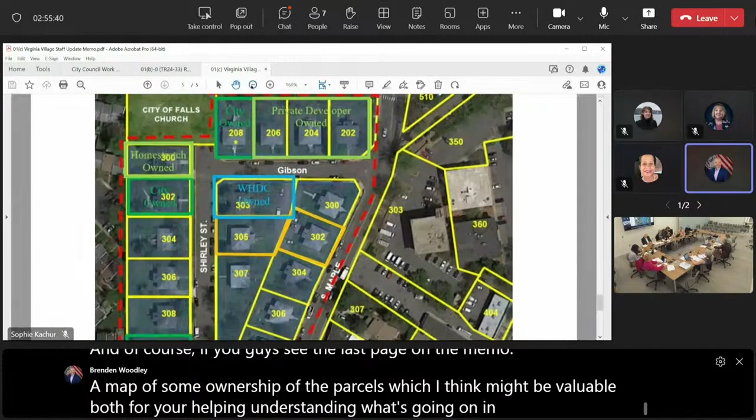We also talk a little later in the memo about the recommended disbursement of rental income that, if you recall, a couple months ago the council approved to the EDA, so we have a disbursement strategy for that. And of course, on the last page of the memo there's a map of ownership of the parcels, which I think might be valuable both for your understanding of what's going on with that property right now and for the subsequent closed session as well. That's it.

Okay, do we have any other comments on this before we go into closed session? I do.

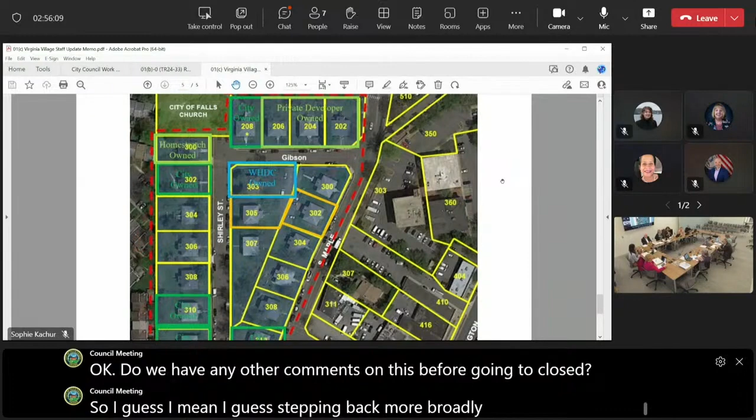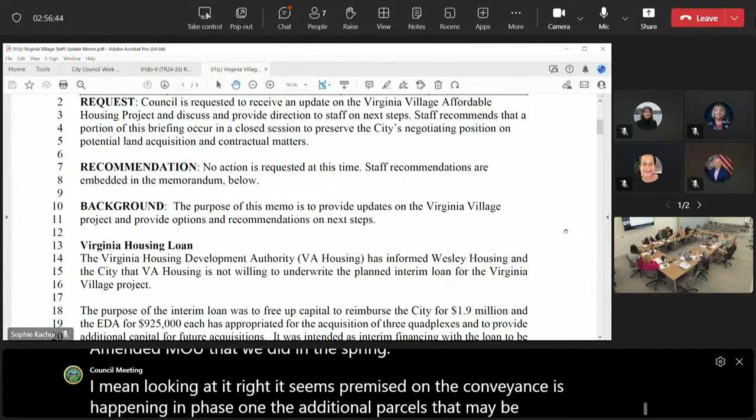So stepping back more broadly, I don't know if you want to speak to it, or if Sally were to speak to it, the current status of the MOU with respect to the project. I went back and looked at both the December 2022 MOU and the amended MOU we did in the spring. Looking at it, it seems premised on the conveyances happening in phase one, the additional parcels that may be assembled, and then having enough parcels assembled to do any redevelopment. I understand the concept of phased redevelopment we may be able to do, but as a general matter, when the foundation of the MOU has been disrupted in a fundamental way, do we need to draft a new MOU to capture where we currently are and the expectations we have of partners that aren't currently reflected in the documents that would otherwise be seen as somewhat controlling?

Cindy, do you want to jump in on that first? Yeah, if I can jump in on the first piece, not a legal opinion or input. I don't think we've gotten to the point of really looking at what needs to change in the MOU, because we need to sort through some of these issues we're working through. At its core intent, the MOU was set up sequentially, phase 1, 2, and 3, without the bridge loan, which was really just to keep the revolving funding going to continue the acquisition. We're currently looking at it more at the same time instead of sequentially, because we've lost time and also had a changing situation. We now own more properties than when that was first established. So I think we have to look at that.

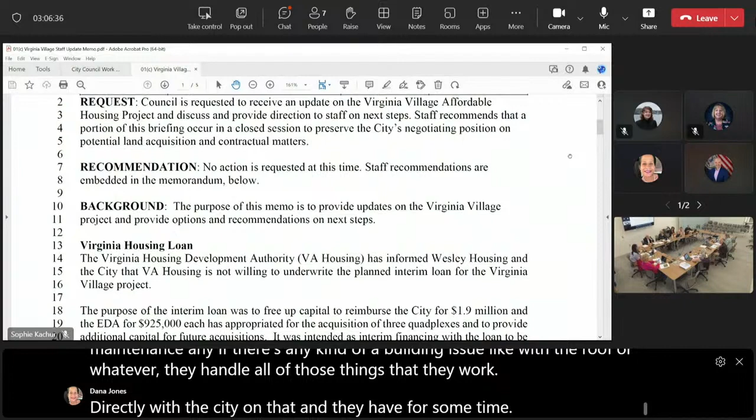Thank you. My last comment is just that I support the preservation of affordable housing. I would support trying to obtain more of these parcels in terms of preserving affordable housing. I think it's an important thing we need to do, and something we definitely need in the city, and that despite our ongoing development, it's still an area we need to be more focused and committed to.

And so I say that, and at the same time, I have an expectation that it is going to be more public and transparent and visible as to what we are talking about in terms of redevelopment, getting public input into what that looks like, and keeping, replacing, or maintaining, let's say, 80 units. At what intensity do you build in order to keep 80 units versus preserving 80 units and getting as many more as you can, while still being able to use the land effectively, and hit different incomes and price points than what we're effectively doing in some other development in the city right now.